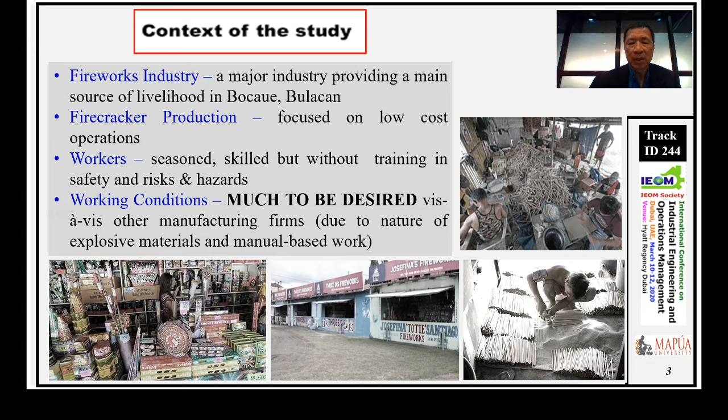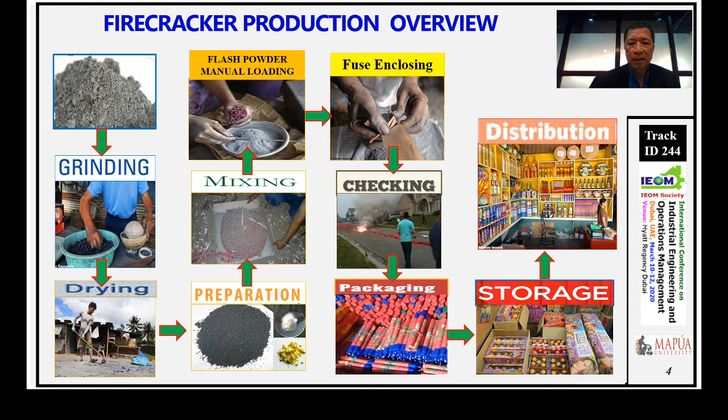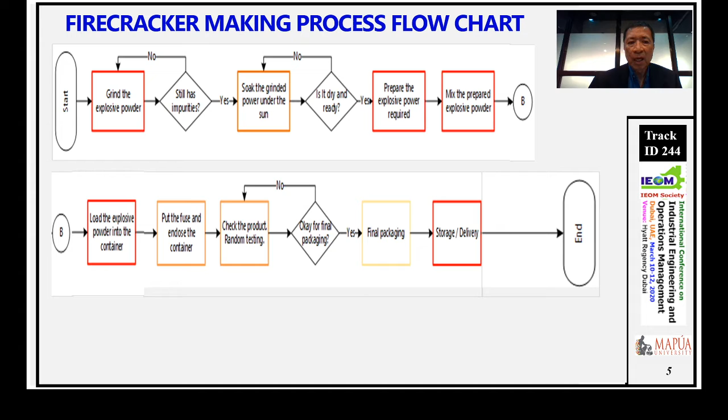So let me just go over an overview of the firecracker production, from raw materials to grinding, drying, mixing, preparation, checking, random testing, and then packaging before it goes to the stores. The making process flowchart, as shown, has color-coded processes, but they all point to risks and hazards as shown accordingly.

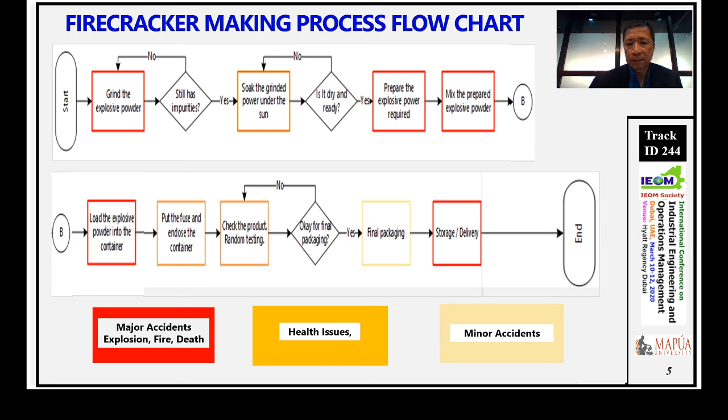So just a redefinition of terms. These hazards present risks, and the study focuses on identifying what these risks are. Examples of which are also shown on this slide. So this study actually was made possible with this adage: they were willing to work all the time, and when people did their best, ought they not to be able to keep alive.

So with this, the questions were raised. One, what significant factors affect the work environment, safety and health of the firecracker production workers? Two, which of these identified risks are most likely to happen and most severe? And lastly, what measures must be developed to prevent and or mitigate these risks?

Thus, the research study aims to assess the current production process in making firecrackers in that locality, to determine the significant factors affecting the health and safety of firecracker production workers, and lastly, to recommend preventive and mitigating measures to

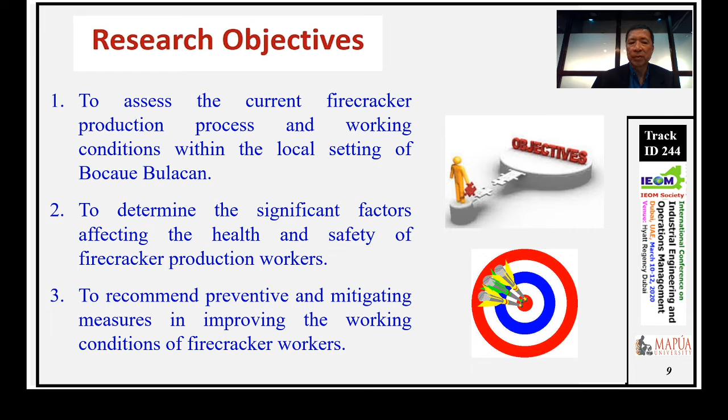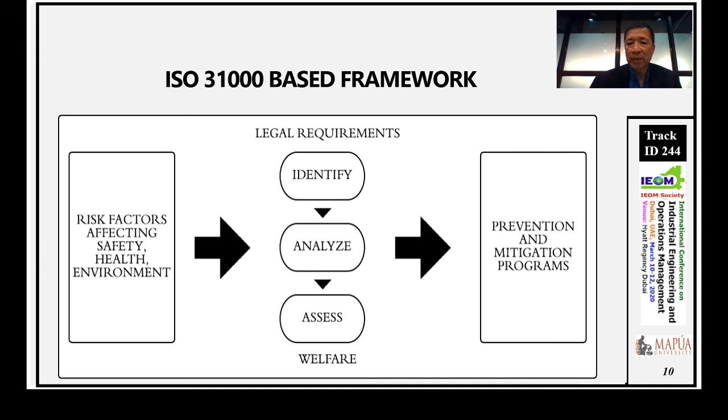improve those working conditions. So the study's theoretical framework is based on the ISO 31000 standard as shown. So identification of risk factors, then analysis of those factors to be able to assess and prioritize, which will lead to the formulation of preventive and mitigation programs.

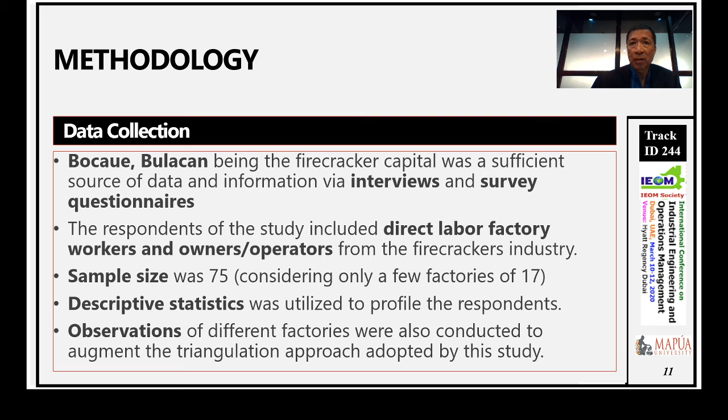The methodology of the study. The scope first is in Bocaue, Bulacan, which was a sufficient source of data and information by way of interviews and survey questionnaires. The respondents of the study include direct labor factory workers, owners and operators from said industry. Sample size was identified considering that there were only a few factories numbering 17. So descriptive statistics will profile the respondents, and observations were also done to augment the triangulation approach adopted by this

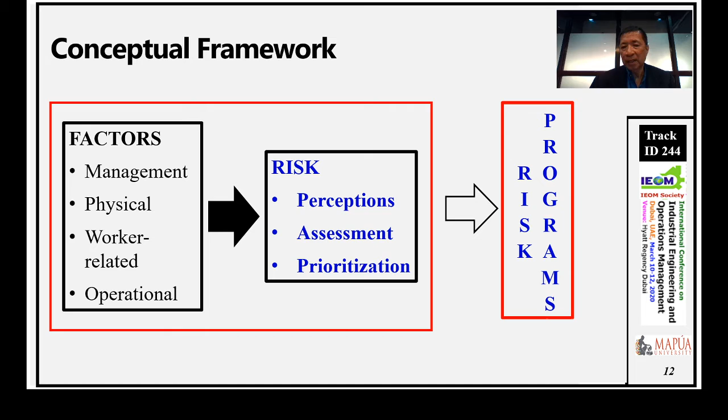study. So the conceptual framework would show that the logic of the study is first to determine the major factors that will lead to understanding of the risk, primarily how they are related to the perceptions of workers and owners as regards risk, that will eventually be the basis for assessment and prioritization. The results of that, of course, will be the formulation of risk programs.

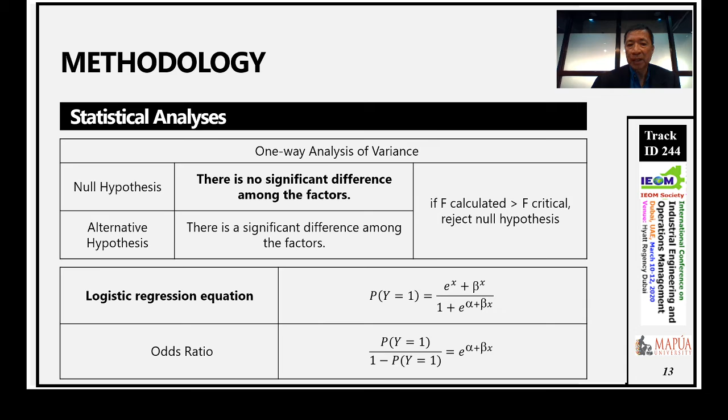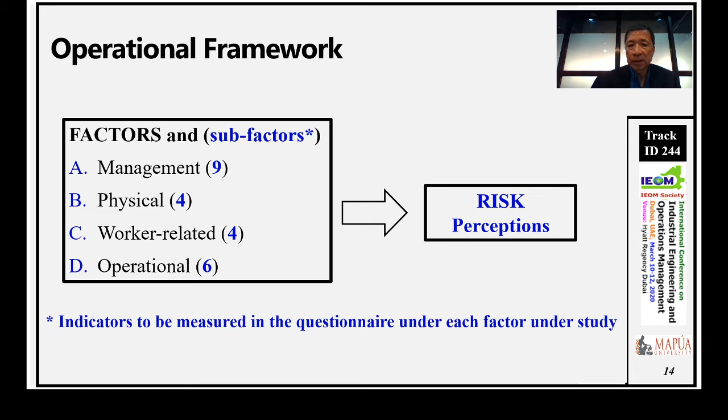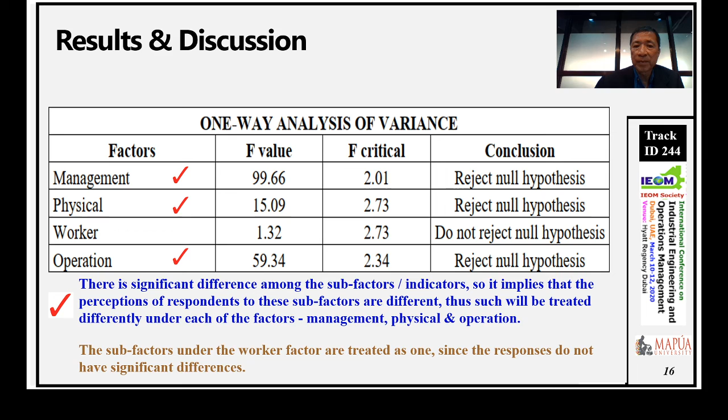So, the results are as follows. The conduct of one-way analysis of variance resulted in having the significant factors of management, physical, and operation. The implication is that the perceptions of respondents to these sub-factors are different. Thus, they will be treated separately under each of the factors: management, physical, and operation. The sub-factors under the worker-related factor are treated as one, since the responses do not have significant differences.

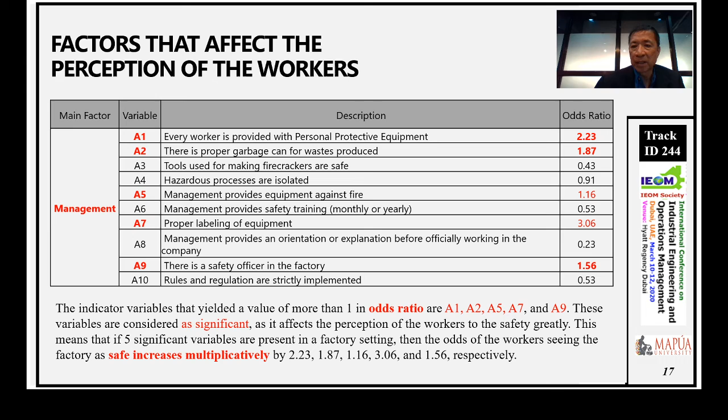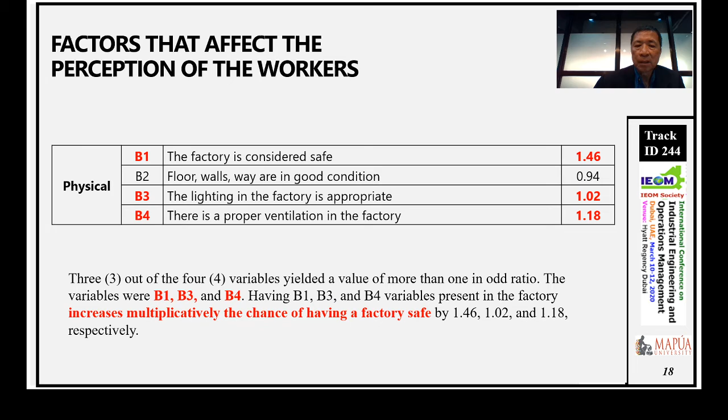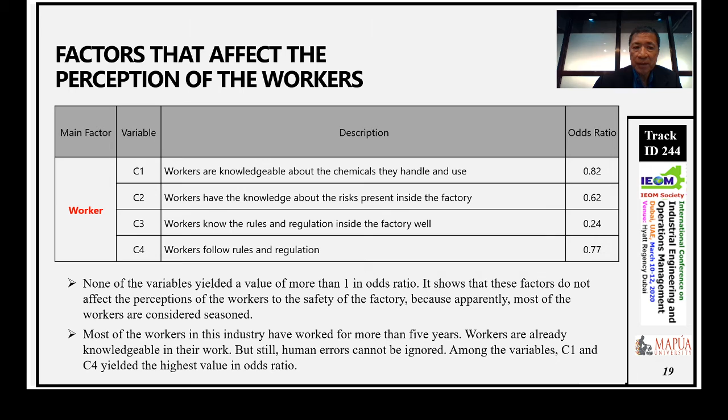In physical, 3 out of 4 variables yielded a value of more than 1. Hence, if these sub-factors are present in a factory, then the safety perception will increase multiplicatively. Under the worker-related factors, none of them yielded values greater than 1. This can be partly explained by how experienced these workers are, how seasoned. Hence, the responses to questionnaires under this factor did not result in significance.

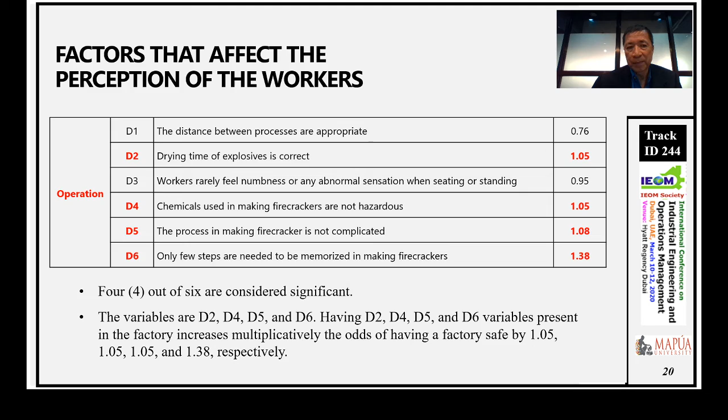Unlike in operations, 4 out of 6 yielded greater than 1 values. Hence, the perception increases with these factors around them, that the environment will be safe. Now, making use of this matrix, the risk response chart, the risk prioritization can be quantitatively done as shown. Results of this analysis show that grinding and mixing have the highest risk priority, reaching 500.

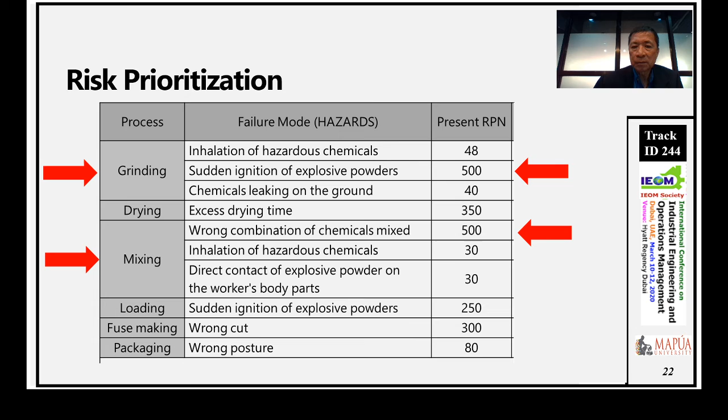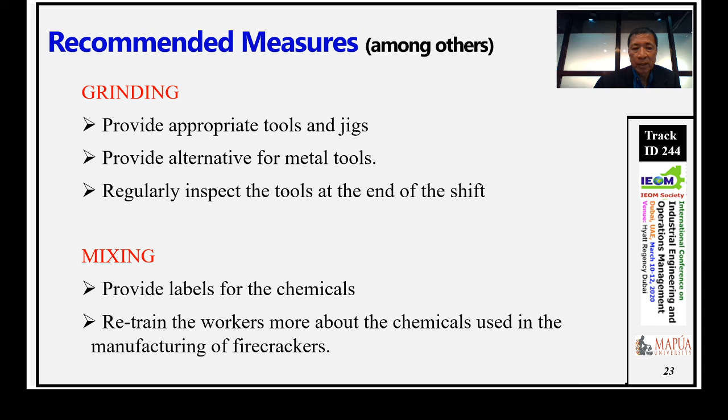And recommended measures, among others, are as shown. Tools and jigs will really help a lot in the conduct of the report. An alternative material for the metal tools will also greatly help, as well as inspecting the tool at the end of the shift. In the mixing operations, labeling for chemicals, maybe as well for tools, will help a lot. And workers, though they are seasoned, would require retraining.

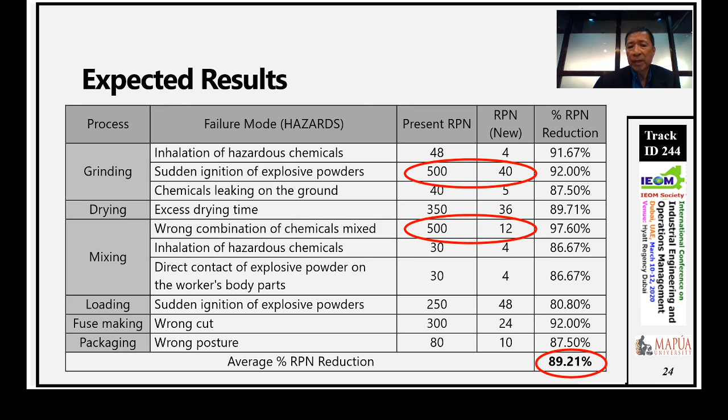So bringing in these mitigating factors as well as preventive measures, not only for grinding and mixing, but also considering the other sub-factors in the other processes, then the average percent RPN reduction will be around 89.21.

So, in closing, I would like to mention that the research questions were addressed and the objectives of the study were met, specifically in assessing the firecracker production process and determining the significant factors affecting risk perception, which greatly help in prioritizing the risks so that the mitigating and preventive measures could be formulated accordingly.

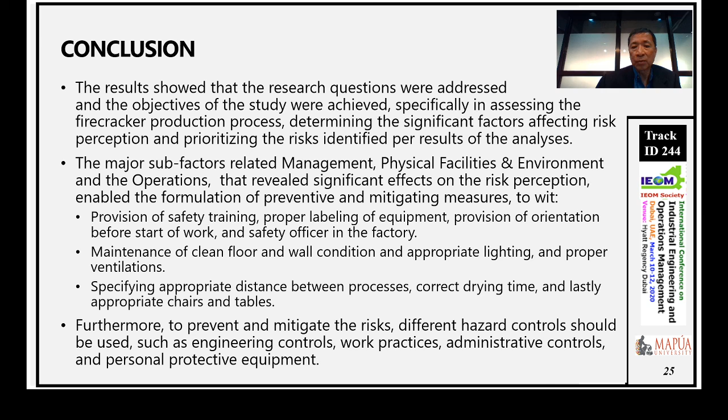Most of these were obtained from the results of the analysis, and furthermore, to prevent and mitigate the risks that were identified, hazard controls should be in place. Thereby, it can drastically reduce the chance of risks, including engineering controls, work practices, administrative controls, and the use of PPE.

So I'd like to go back to the adage: they were willing to work all the time, and when people did their best, ought they not to be able to keep alive? Yes, we need to keep them alive, as this is a major industry in the Philippines.